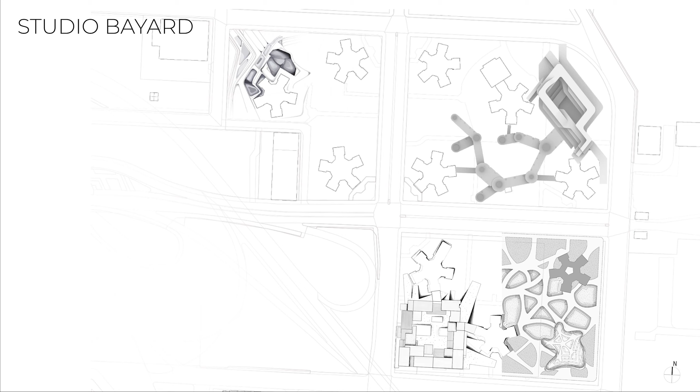Currently, there is a disjunction between the existing Fairgate towers and the landscape. The intent is to design a housing project that blurs the boundary between the two and connects not only to the other Fairgate towers but to neighboring communities.

We initially started by individually creating a map collage to analyze and introduce intermediate scales. Some groups used their collage to bridge the connection between the Fairgate houses and the neighboring communities, while others uncovered historical facts that influenced their design.

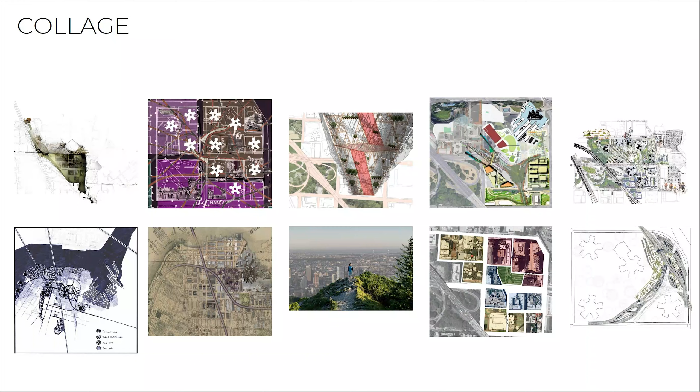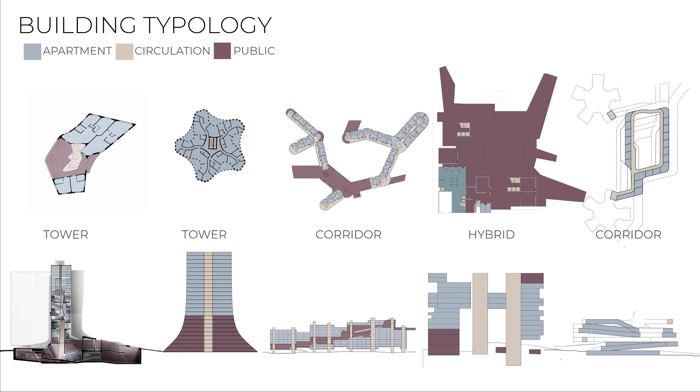Overall, our projects have a wide range of typologies, programmatic organization, public and private separations, unit layouts, and connections to the existing Fairgate houses. The typologies of the projects in our studio varied greatly between having vertical and horizontal expansions, central and dispersed cores, as well as single-loaded and double-loaded corridors.

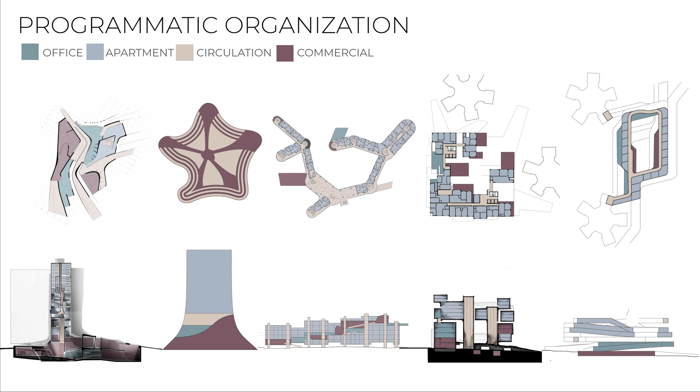Interestingly, some projects in our studio focused on blurring the boundaries between different programmatic elements to create opportunities for diverse groups of people to interact.

That being said, many projects in our studio seem to follow a more typical system of programmatic organization by having commercial space at the base, followed by office spaces and residential areas.

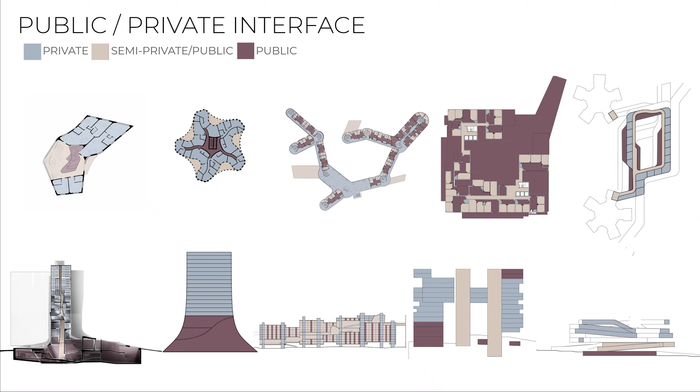Some projects have more definitive boundaries between public and private spaces, while others attempted to create a more blended program to allow for more interface between residents and other members of the community.

Many projects in our studio physically collide or merge with the Fairgate houses, while others attempt to establish a more visual or symbolic connection between the existing buildings and the greater site.

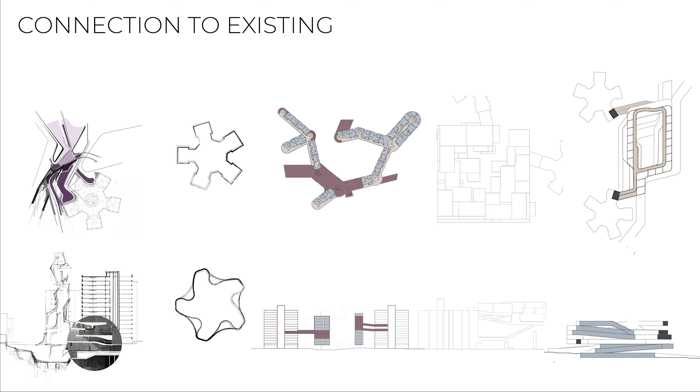Zooming in more specifically into the individual unit types, a variety of our class projects wanted to maximize the amount of natural sunlight received by each apartment unit.

Additionally, some plans follow a more strict organizational system by having standardized unit layouts, which repeat and rotate throughout the building, while others have more irregular systems with units which are unique to each floor.

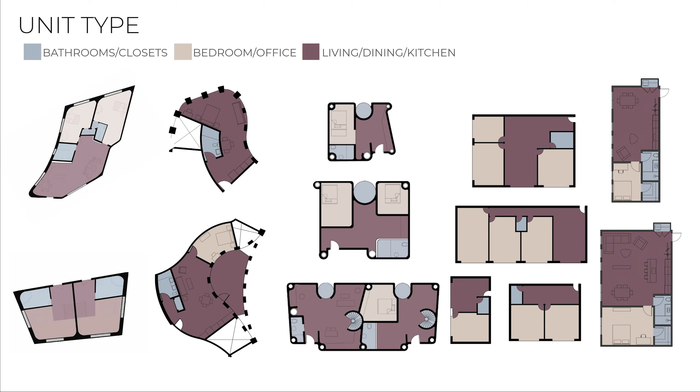Generally, throughout each project, there is an emphasis on maximizing the amount of space within each apartment, but still allowing for open common spaces. Honing in on each individual project, Nicole and I would like to start off by presenting

our proposal to design a housing project that reconfigures the landscape, redefines community and education through greenhouses and biological labs, reshapes the connection to the nearby Fairgate Tower, and overall, through the use of landscape, blurs the boundaries between different communities in order to bring people together.

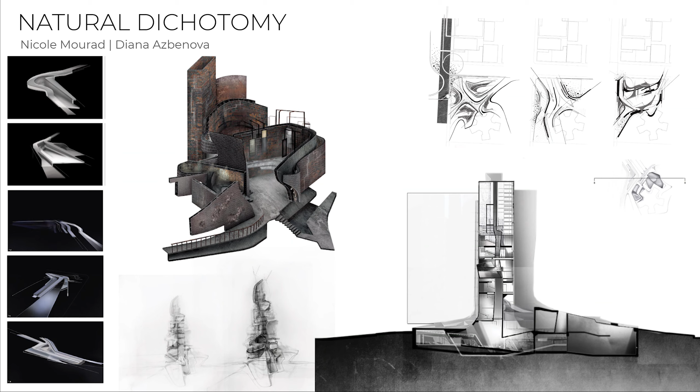There's an interesting juxtaposition to be analyzed between inside and outside, individual and society, private and public, the natural world, and the urban environment. Our concept focuses on natural versus unnatural elements and how the interweaving of these components influences the fabric of the communities.

This next project is by Audrey Tuck and Andrew Mickelson. Boolklyn Tower derives originating massing and programmatic initiative from organic forms and agricultural land use occurring on the site through the majority of its history.

This form was then arrayed to reflect the pentagonal organization of units and circulation in each Farragut house. The subterranean base contains a vertical farm which extends up through the ground level lobby and second level co-working space to transition to a resident amenity floor and subsequent residences.

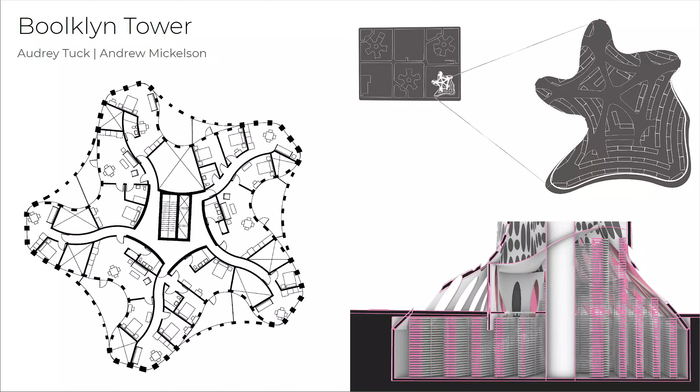The organization of units within the tower is controlled by a parametric fenestration system, also derived from the original forms of the landscape. This system arrays 1- and 2-story openings according to a pattern allowing for effective layout and daylighting of studio to 3-bedroom units.

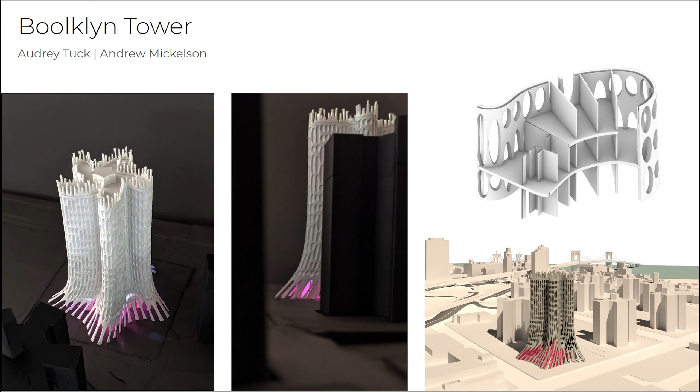This next project is by Juyeon Park and Tamar Salinger. The project acts as an extension to the Farragut housing, a horizontal and elevated system which spreads between the existing trees, connects to the Farragut housing, and offers public spaces and a new type of dense living.

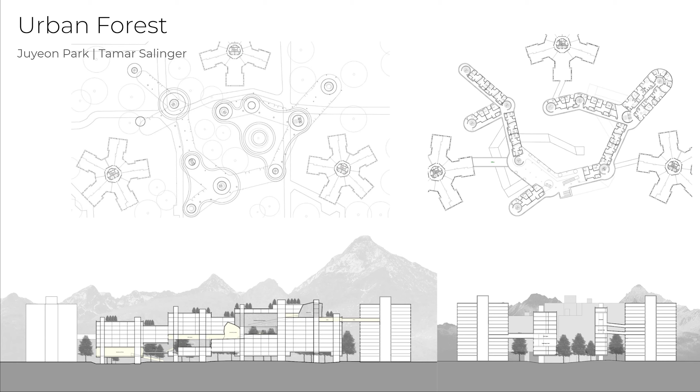In response to the climate change disruptions and catastrophes, the initial point of the project is to allow the greenery and trees of the site to be a safe zone in times of flooding, and the mass is spread in between the existing trees and greenery of the site.

Through an idea of a trail, public and private programs are integrated into the residential functions, connecting the entire building for both the residents and the local neighborhood.

The spreading and elevated massing of the housing is achieved through vertical elements of structure, infrastructure, cores, and greenery which connect the residential system.

This next project is by Arif Khan and Qingsong Wang. The project is inspired by the urban fabric of the site, absorbing the site into the intersection of scale, context, and program where it lies.

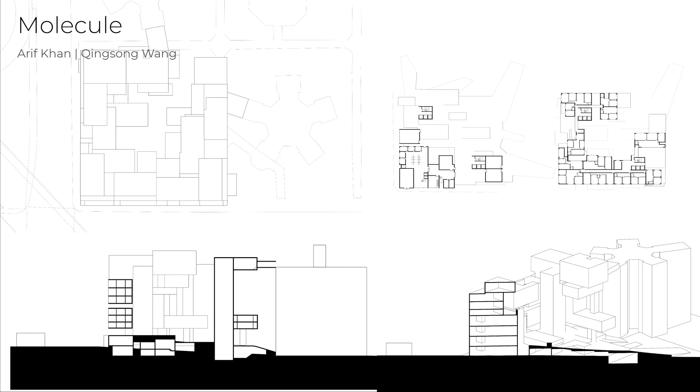A framework of homogeneous forms interact together, creating unity and division. A binary circulation program creates a programmatic hierarchy and defines the public and private spaces. It creates a network connecting the open spaces and different zones of the building.

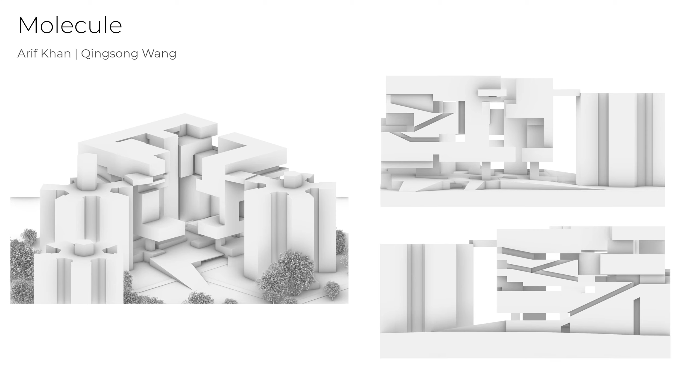The next project is by Danielle Pelletier and Dana Saari. The objective of this project is to restore the relationship with water that the Farragut residents once shared with the East River prior to the high-end residential developments in Dumbo.

Rather than building around climate change, which implicates that the flood risk on our site will significantly increase within the next 60 years, we wanted a design that would alleviate flood risk and even celebrate rainwater.

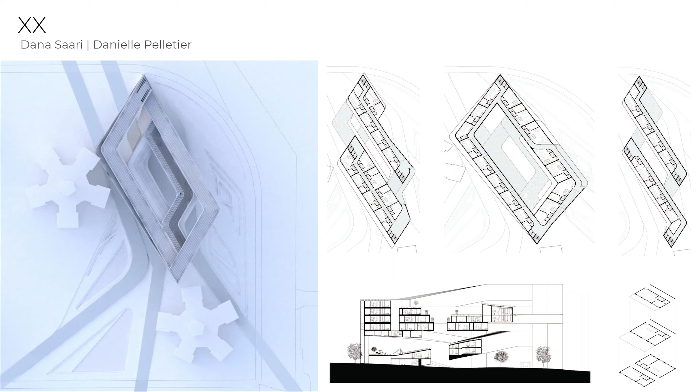Not dissimilar to rain gardens, the building absorbs water through natural green space and redirects its flow, which intertwines and engages with the flow of pedestrians all the way from the site to the building.